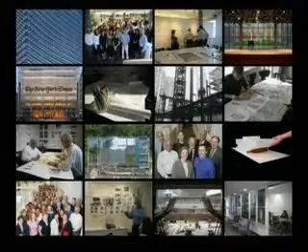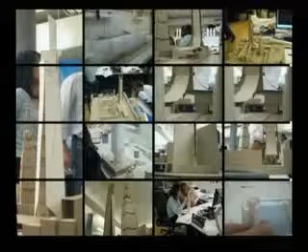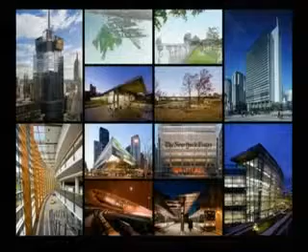I practice in New York with 4 partners, since I'm expected to introduce myself. Our notions are simple in terms of the working process. It's about experimentation in work in the hope of contribution. We have a very diverse practice. We work all over the world, from Shanghai to New York to the Middle East and Japan and all over. My colleague Jamie also has this very diverse practice.

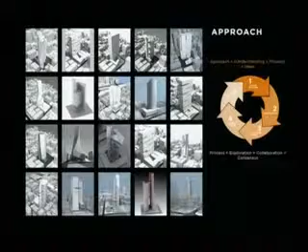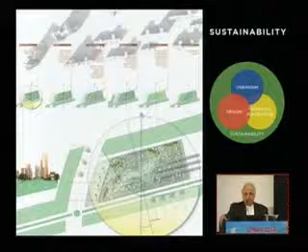Our work is based essentially on a process of exploration and finding the right solutions specific to specific sites. And we are deeply rooted into sustainable issues, as many of you may know or may not know. One of the first tall buildings in New York, the Condé Nast sustainable building, before the LEED certification process started, was done by us. We are very much deeply rooted into it, and into understanding the local climatic conditions as well.

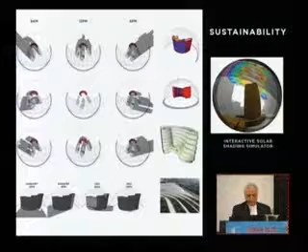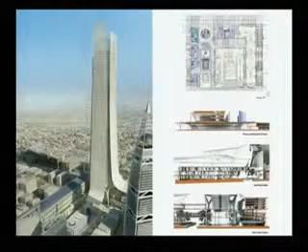With that as background, although I'm going to talk about infrastructure, like most architects, by the way, we design a lot of tall buildings. This one was designed by my 2 partners with Renzo Piano out of Genoa. But I have designed many tall buildings myself. This is a project in Riyadh, a tall building. I won't go deep into every project in terms of explanation, but the fundamental idea, even when designing a tall building, in my opinion, is to think in terms of the bigger linked thinking process.

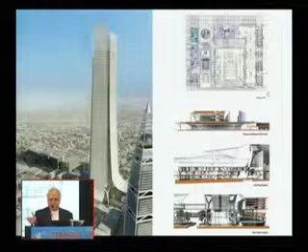What I mean by that is simply to quote one of the great architects of the last century. He said that when you think about a chair, you think about a room, and when you think about a room, you think about the house, and when you think about the house, you think about a community, and ultimately the city, and in reverse. That thinking process is essential while you're designing a building.

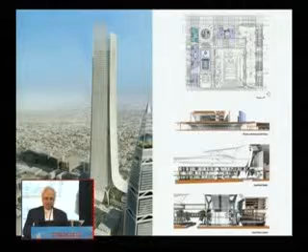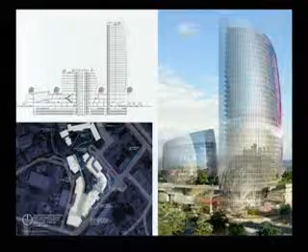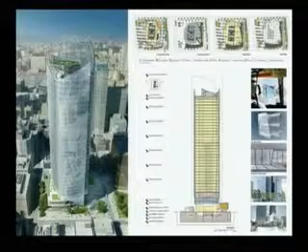We are currently also working on a project in Addis Ababa, a mixed-use project, and a project in Osaka, only a block away from the city hall. Incredible site, incredible surrounding area, and we really try to link this project into their current infrastructure system, doing multiple things. This brings me to Riyadh.

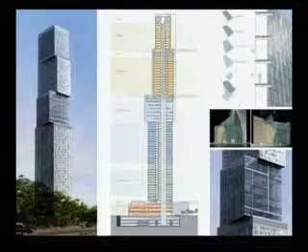Actually, I'm flying from here to Riyadh to meet with a client. We're doing about 10 buildings for this client. This one is a mixed-use building with residential on top. This was an opportunity we were given in Mumbai to do a tall building, and finally in Shanghai.

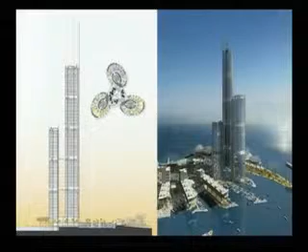In Tianjin, I was given an opportunity to design a 100-story building, and in Dubai, another 100-story residential building. And then finally, an opportunity to create a city, or a small part of a city, for about 100,000 population.

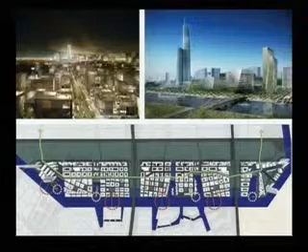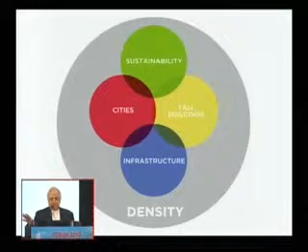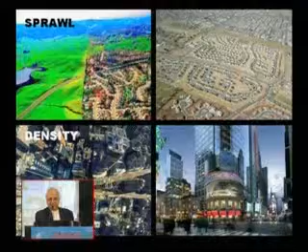The key thing about all of this is that our work is based on simply a notion that cities, sustainability, tall buildings, and infrastructure equal density. Many speakers spoke this morning about how that density should be managed and controlled, but the key thing is about conservation of land and conservation of resources.

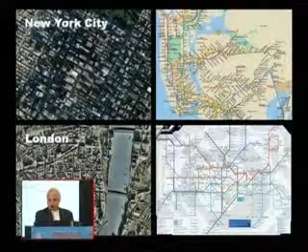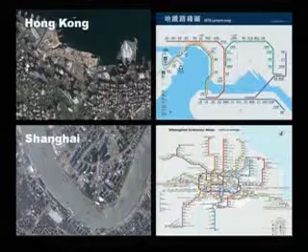So the issue is always about sprawl versus density, supported of course by the public transportation system. New York City has a great public transportation system, so the city functions. London has another equally great public transportation system, so it works. Hong Kong has a relatively good public transportation system, and so does Shanghai.

That brings me to two cities I want to compare for a moment. Mumbai, because of British rule, already had a setup for infrastructure. As Anthony Wood said earlier, somehow Mumbai failed to make a decision 40 years ago to invest in infrastructure, but it has all the basic fundamentals in place. And of course, the issue of capacity is here as well, as was stated.

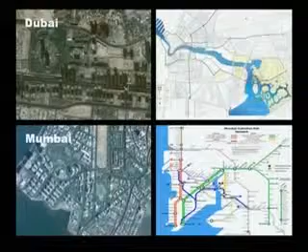With those things being said, India's population almost demands a density and public transportation system. This is a great photograph of Mumbai, by the way, at Chowpatty.

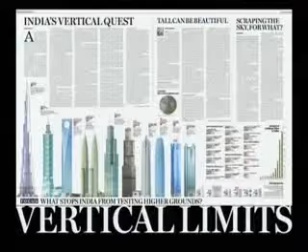Very recently in Delhi, there was an article in Financial Express which compared where the rest of the world is in tall buildings versus India. A slightly misinformed article—they missed a lot of buildings in Mumbai—but nevertheless, they were trying to make a comparison between where the rest of the world is in terms of FSI, tallness, density issues, and so on. That brings me to the issue of how this city peaked its capacity a long time ago.

That brings me to four projects, because I just mentioned Dubai a little bit. Dubai is a relatively new city and doesn't really have a background in infrastructure yet, but they've started to do something about it in a significant way. I'm going to show you four infrastructure projects in Dubai very quickly.

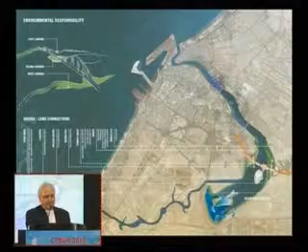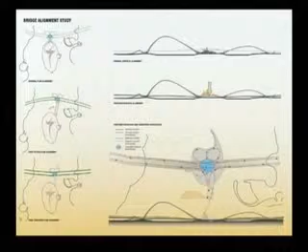We were given an opportunity to design a bridge, actually called the 6th Crossing Bridge, on the creek. While designing the bridge, we first questioned the alignment issues. We then created a bridge which is a double-arched bridge with cable stays, which looks like this.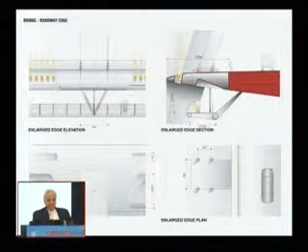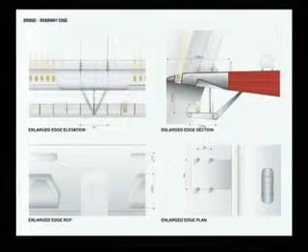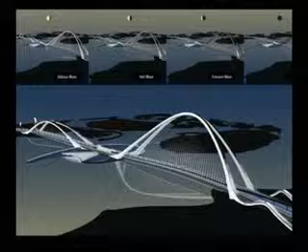But while designing the bridge, we also did multiple things. We thought the bridge has an obligation to do more than just carry cars. So we included pedestrian walkways underneath the bridge, so people are always in the shadow, as shown in this section. We were also inspired by the local cultural aspect—I'm always intrigued by Arabic calligraphy, which has such great fluidity that I thought the form could take clues from that, and thus this form as well.

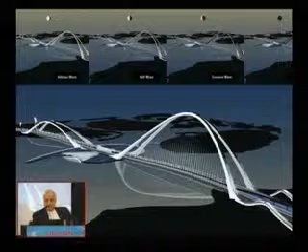And the lighting was based on the moon calendar, as we all know the Islamic calendar is based on the moon.

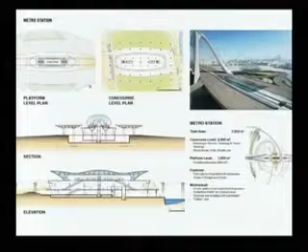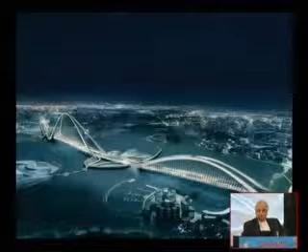Besides doing the bridge, we created a situation where an island is formed with many amenities, including a train station, amphitheater, and ferry terminal, so it became more than just a bridge. It added a tremendous amount of amenities and further supported a reserve for birds. Surprisingly, Dubai has flamingos and ospreys, which was an amazing surprise for us.

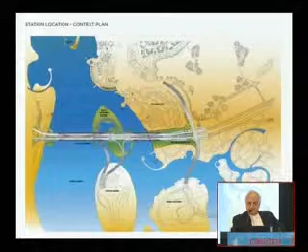That takes me to another project called Opera House Station, a new line being designed—we are currently working on this project, a train station near the 6th Crossing Bridge. They asked us to design a simple station. We said no, it cannot be a simple station, it needs to connect into the city, it needs to facilitate. So finally we convinced them to take far larger land, connect to the city from the ferry terminal on one side to creating a station, and convinced them not to have lots of parking either, which is unusual in Dubai.

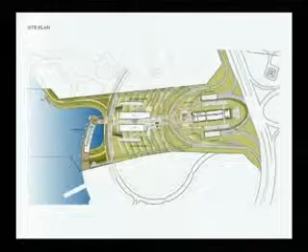So there's no parking here, by the way. It's all connected—it's an intermodal facility.

The result is basically a simple structure raised on a viaduct, totally dependent on daylighting conditions all the time during the day. We came up with another idea here, which is not unusual: air-conditioned spaces where people are, while where the trains are is basically non-air-conditioned space. We depended on the idea of the train essentially doing the rest of the trick, getting the heat out of the station.

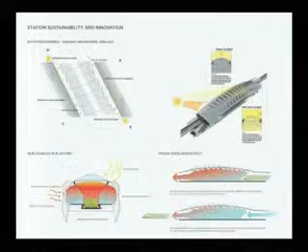That's what these diagrams show. During the daytime, we're hoping we would not need any artificial light, as we're trying to use a material that would create this daylight condition all the time—it's called Foiltec.

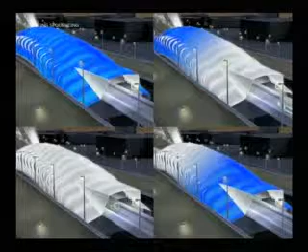The lighting was designed so that when the train is in the station, you would know it, and when the train is not in the station, you would know that as well. And the final image.

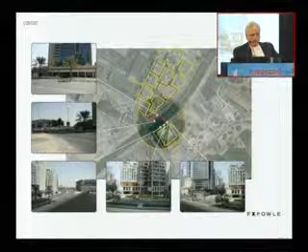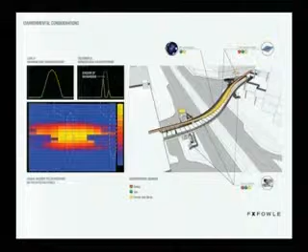That brings me to another project we're currently working on—it's a pedestrian bridge. There are a lot of pedestrian bridges being designed here, which I've seen recently—rather unfortunate structures, I would say. But having said that, we were given the opportunity to design a skywalk, and we created this idea of connecting the two buildings.

More than that, we really carefully studied the sun and orientation, and used a scripted program to create the shading elements in the appropriate locations and places without compromising aesthetics.

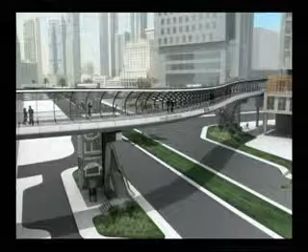These are some of the drawings and images as they stand right now, and the lighting as well. Lighting is always very important, by the way—how you do it without creating light pollution. Because Dubai is sometimes blinding, in many ways.

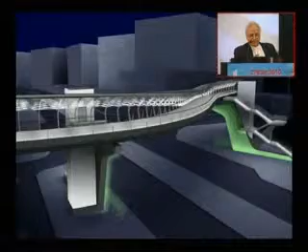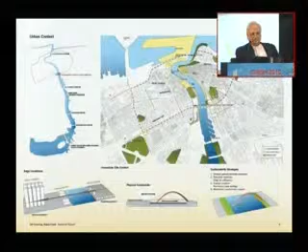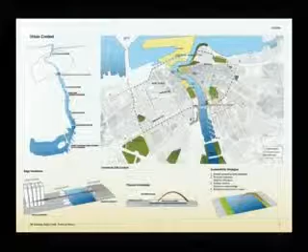That brings me to the bridge called the 6th Crossing Bridge. We were inspired—this is a bridge much closer to the sea, where the creek begins to come into the Dubai area. Here the challenge was that there are basically two consulates being planned right across, so they didn't want any tall structures.

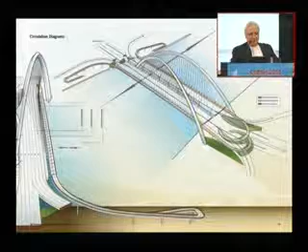Our point of inspiration was their national bird, the falcon, and thus the wings of the falcon. I thought it was wonderful to have a U.S. embassy represented by the eagle, a British embassy represented by the lion, and this one represented by the falcon—three wonderful species that could come together in some way.

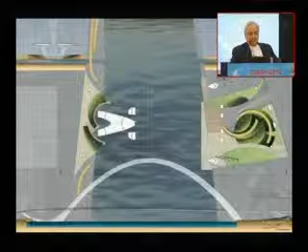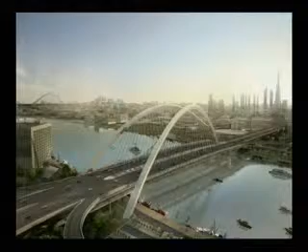These are the drawings of that bridge. Even at the ground level, we created landscape elements that provide incredible connection into the city, with pedestrian walkways—and some final images of the bridge.

I hope I'm doing okay on time, I'm trying to do it as fast as possible. And the final image of the bridge, by the way.

I believe there's a small animation, and then it will conclude on two thoughts.

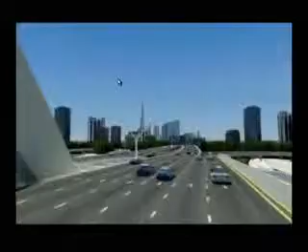By the way, in this world of globalization, this animation was done, believe it or not, in Argentina. We are based in New York, the project is in Dubai, the delineators are based in France, and the animators are based in Argentina for this project. It's incredible how easy it is to do all of this without a glitch, which is very interesting.

My final two points are very simple—I'm always inspired by these two thoughts. At the end of the day, we can rationalize, we can argue, we can do many things, but two things do matter. The first essentially says that designers should be involved in designing all components of the built environment, therefore making a change and improvement. It's wonderfully said: it's not about the world of design, but the design of the world. So even a billboard in a city is important, so is transportation, so are elements of transportation—every aspect needs to be thought through.

The second one is equally important—it's from John Hockenberry, and I really like this one. It essentially asks us to distinguish and separate between the meaning and the noise, and by noise, I believe he means the visual noise. Because we can all make the error of creating statements after statements, which could equally cause problems in the city as well. And with that, I'm done.